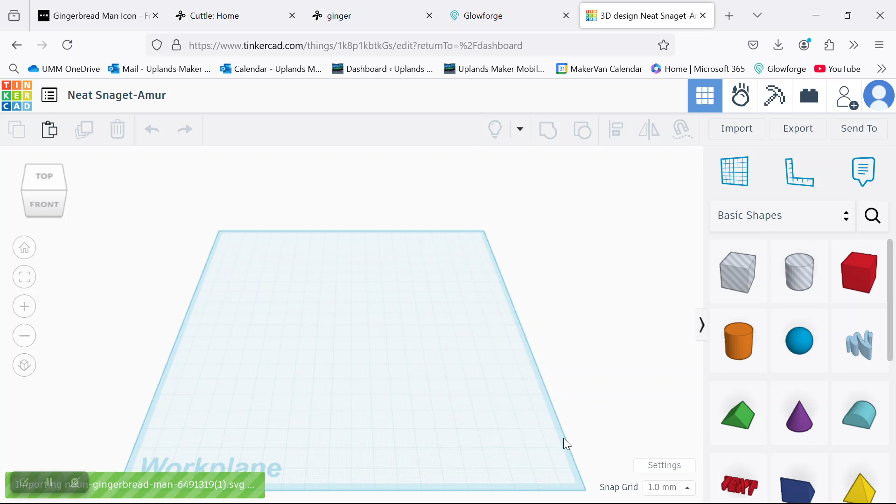So we want the art. This is the size. You could change the size here, obviously, by changing percent or changing the length and width here. And import. I haven't tried these yet. I don't know how it's going to come in, but I have an idea how it's going to look when it comes in. There we go. So there's our gingerbread person.

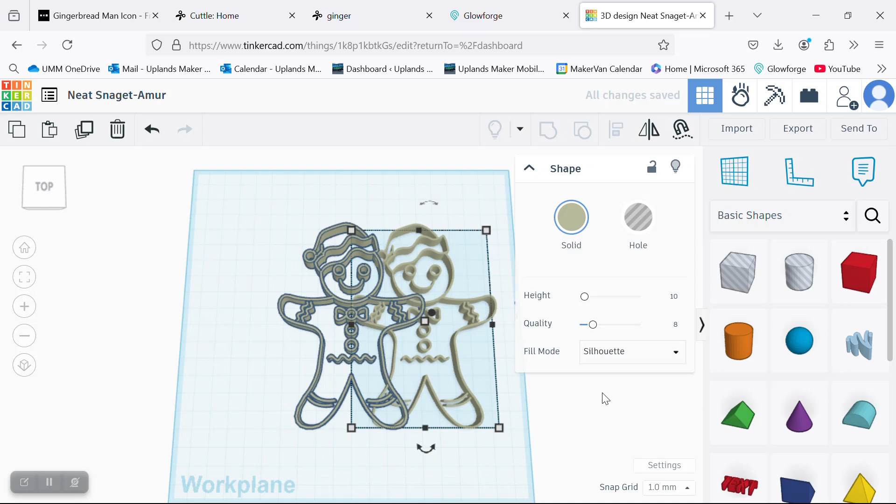Not bad, but things are not all touching, right? Okay, so what we need to do is copy that. And over here on the fill mode, we are going to go silhouette. What happens? It's thinking. Sometimes it takes too long to think. It fills it in completely, which is awesome because that's now going to be our backing.

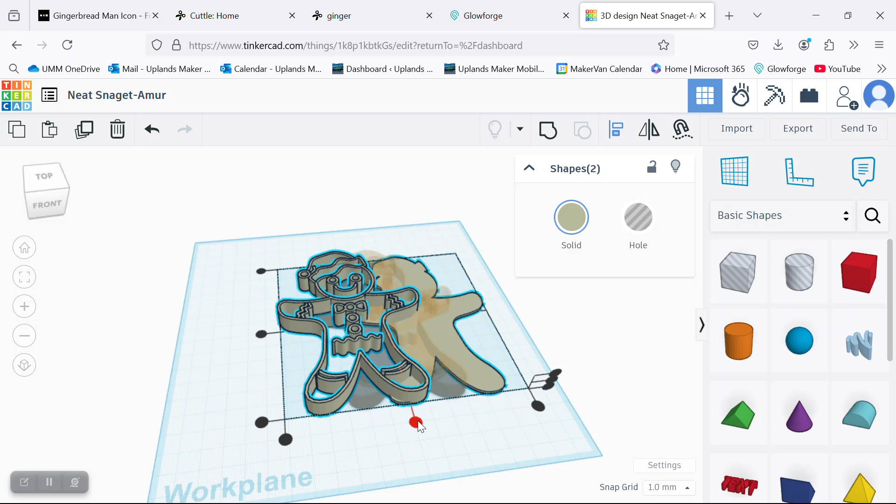So I'm going to make that only 1 millimeter tall. And then I'm going to line these up with the align tool. Boom, boom. And this top one, I don't want a centimeter thick. I'm just going to make it 5 millimeters thick. And then we want to group them.

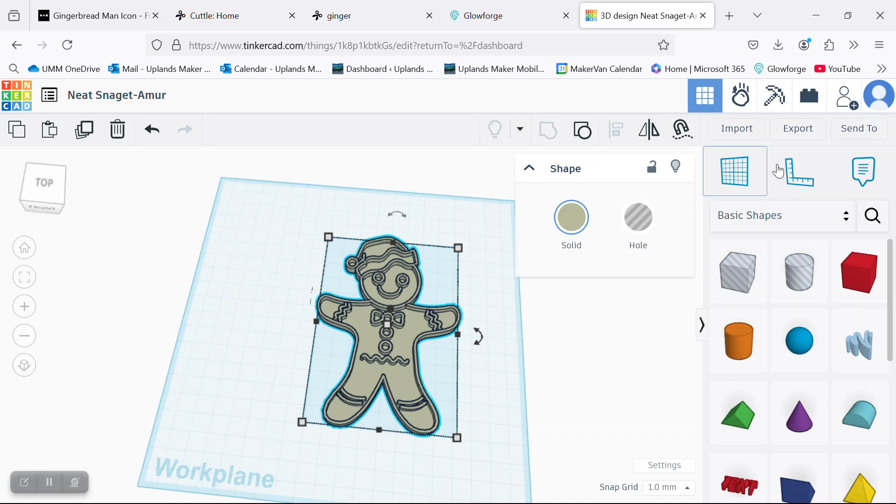And now is a good time if you want to change the size. Now is the time you would change the size. Again, this is bring the ruler over. This is 118 millimeters, so that's 11 centimeters. That's like all the way across your palm and your thumb. Not a bad size. And so then you export your STL.

And you go to your, oh, I should have changed the name. I forgot, sorry about that. You go to your slicer, whatever slicer you're using, and you slice it for your 3D printer.

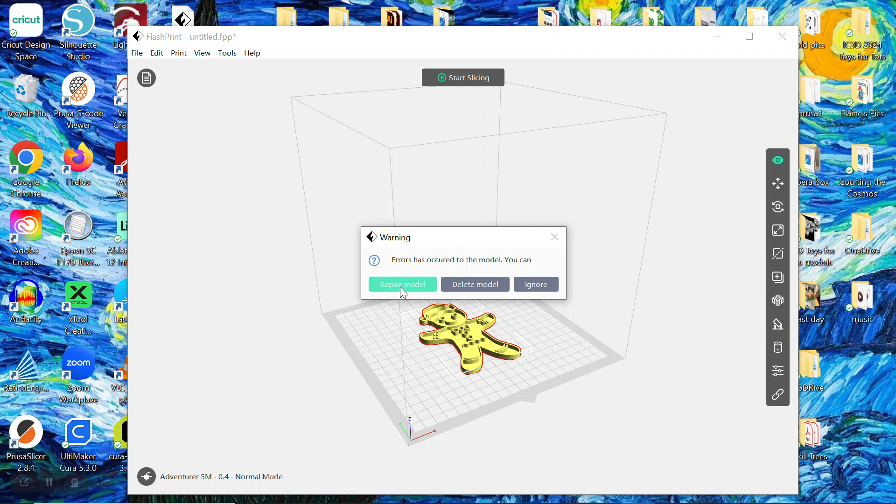Boom. Errors have occurred. I don't know what errors would have occurred. You slice it. How long is this going to take on this 3D printer? Let's see, I'm at 0.25 layer height. So this would take 19 minutes. Okay, so there you go.

How to laser cut or 3D print from an SVG. So it's holiday, so we picked gingerbread. Enjoy.